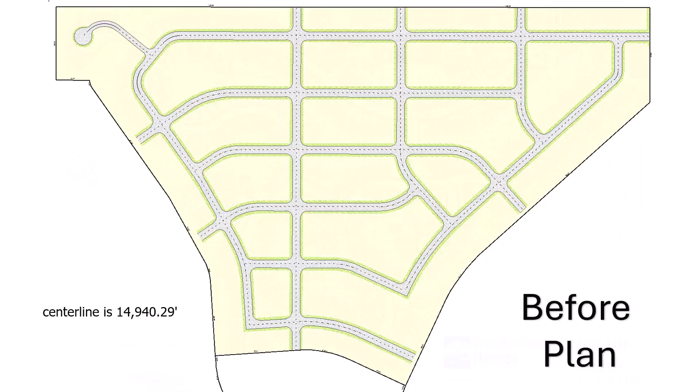This is the actual plan of Horizon Point before our studio was retained to redesign it. There is nearly 15,000 linear feet of street, which translates to almost 3 miles of dedicated street the city would have to maintain in perpetuity. This translates into 6 miles of sidewalks combined with the 3 miles of utility mains.

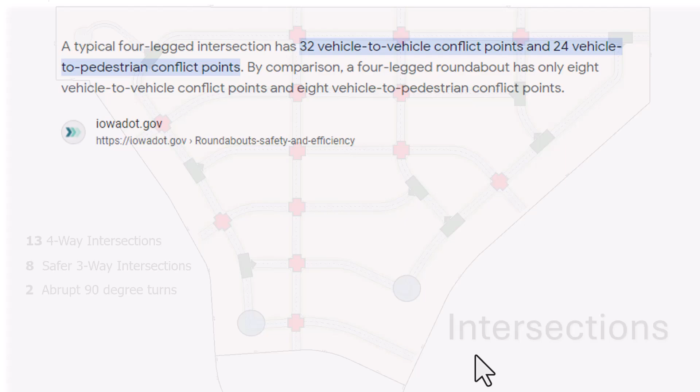This slide shows that there are 13 four-way intersections, 8 much safer three-way intersections, and 2 abrupt 90 degree turns. Each four-way intersection has 32 vehicle-to-vehicle conflict points and 24 vehicle-to-pedestrian conflict points. Four-way intersections also lead to T-bone crashes known as broadside or side impact collisions.

Victims often suffer severe or life-threatening damages including brain injuries and spinal cord damage, yet many urban planners promote the use of grid design that increases four-way intersections. It is important to consider traffic flow. In 1687, Isaac Newton discovered a body in motion tends to stay in motion. Now imagine that body being a 2-ton vehicle driving through a neighborhood.

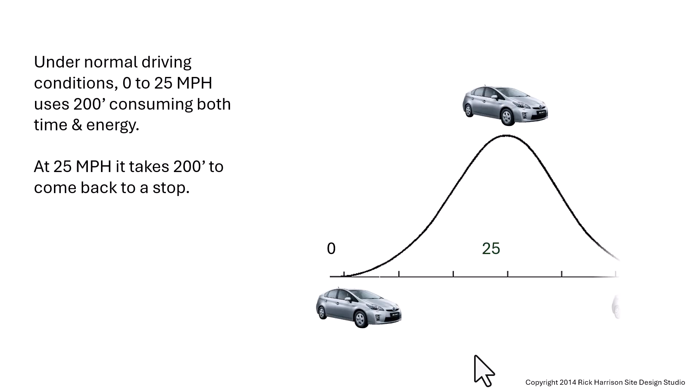Under normal driving conditions, accelerating from 0 to 25 miles an hour, approximately 200 feet will be consumed to achieve residential design speed. Beyond that 200 feet, the vehicle is maintaining flow, consuming much less energy and much less time. However, that vehicle has to come to a stop, which also will consume 200 feet. Thus, the stop, accelerate, stop distance is about 400 feet, and anything beyond is efficient in both time and energy.

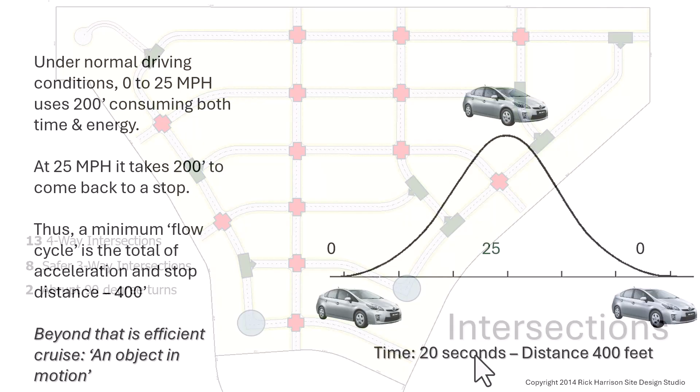Each one of those four-way intersections is going to have at least one street having a stop sign, if not both streets. From an energy and time perspective, just to get home, this previous design is extremely inefficient. Because of this, residents will tend to roll through intersections and tend to accelerate more than normal just to get home. The grid produces a massive amount of length of street, which consumes 22.6% of the site.

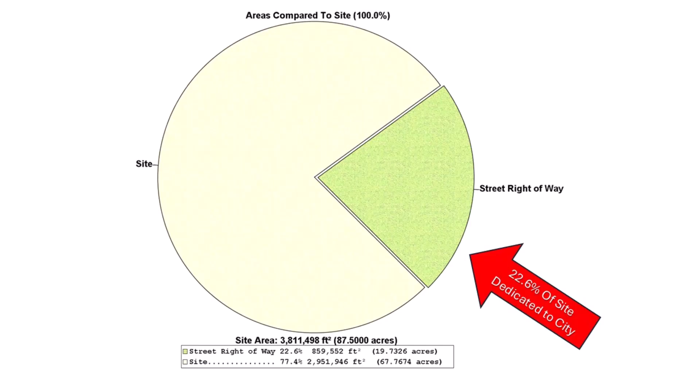It is dedicated to the city and not dedicated to the residents who are investing in the neighborhood. Compared to the total site area, 15.2% of the entire site will be street pavement, which the city will have to maintain forever, contributing to runoff of stormwater.

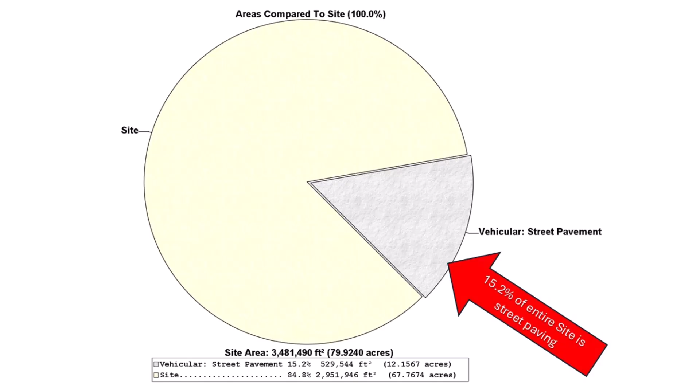Before we continue with this presentation, we would agree with many urban planners that the typical curved street subdivision may introduce several problems with connectivity and efficiency. Any product can have bad design or good design, and poorly designed curved developments become the target of those that believe the urban grid of the past is superior. It is important at this stage to demonstrate how much waste is in the grid design thought to be efficient.

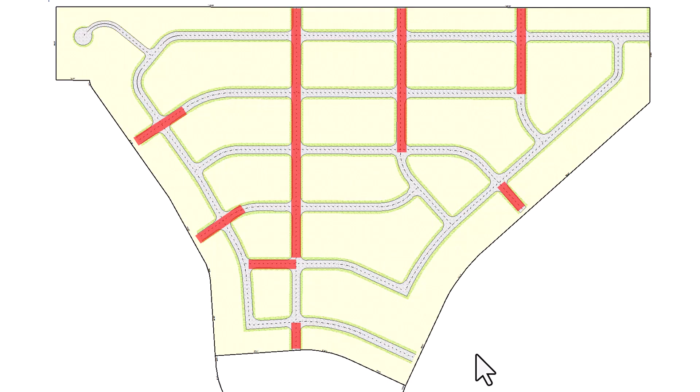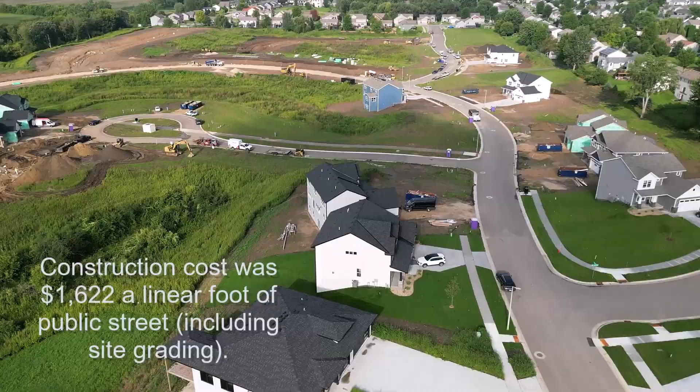As an international land planning firm, we typically do not get involved with the local economics of development. However, we did recently develop a similar-sized neighborhood in Rochester, Minnesota. In 2024, our cost of construction was $1,622 a linear foot of street. Similar to Horizon Point, our development is on rolling terrain, where a curved street pattern as we design it conforms to the natural flow of the land versus a straight street grid which does not.

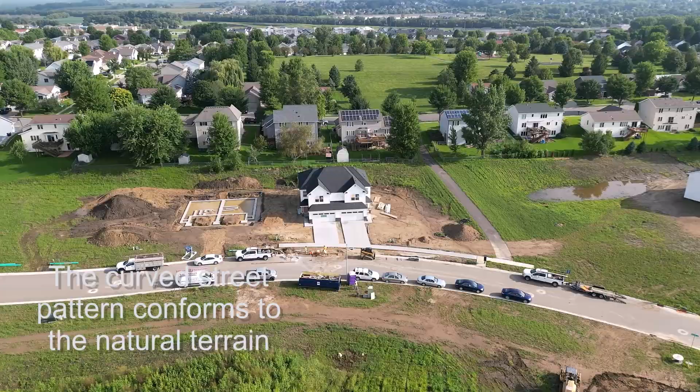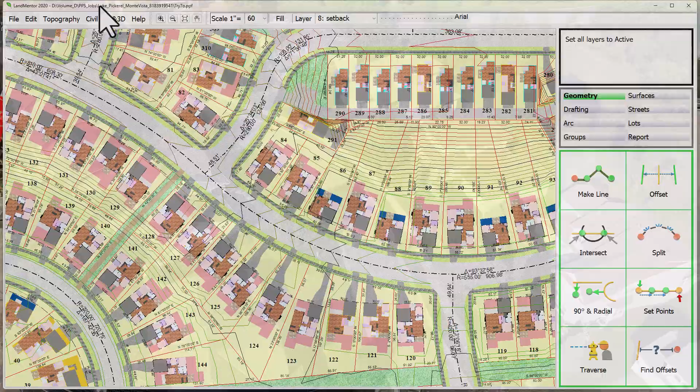If construction cost is similar in your region, the 3,830 linear foot reduction of street would equate to an $18,655 reduction per lot in construction cost. This cost reduction can be used to provide a better home with better landscaping at a more attainable price. But a properly designed development harnessing the latest geometric patterns and technologies offers multiple advantages over the grid of the past, which we will explain here.

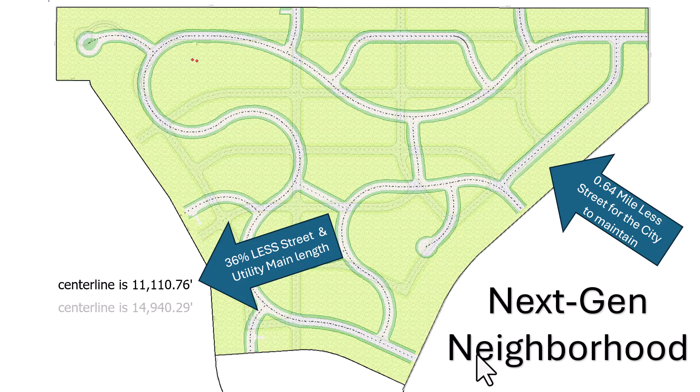Our redesign of Horizon Point neighborhood utilizes these new methods, which eliminate the waste of urban and suburban patterns, with only 11,110 linear feet of street, which is 36% less street and utility main length than the original grid design, more than half a mile of street that the city will not have to maintain forever. We demonstrated previously the grid is in fact extremely inefficient in both time and energy. Looking at Horizon Point, a main street maintaining constant flow defines most of the neighborhood.

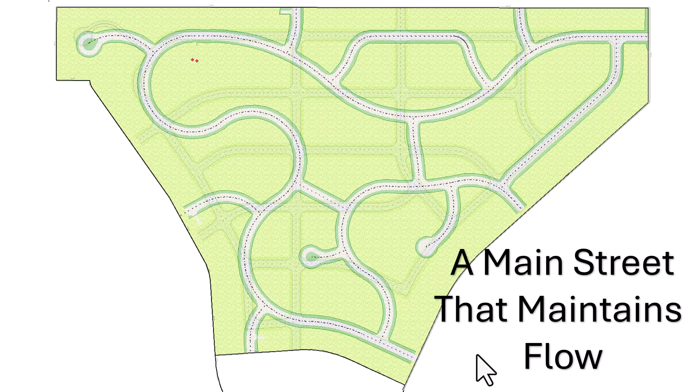Combined with another smaller loop street, it should be obvious harnessing the curves in this way significantly increases the efficiency and attractiveness of a neighborhood. In addition, the curved streets are naturally traffic calming. There are no four-way intersections, only three-way intersections.

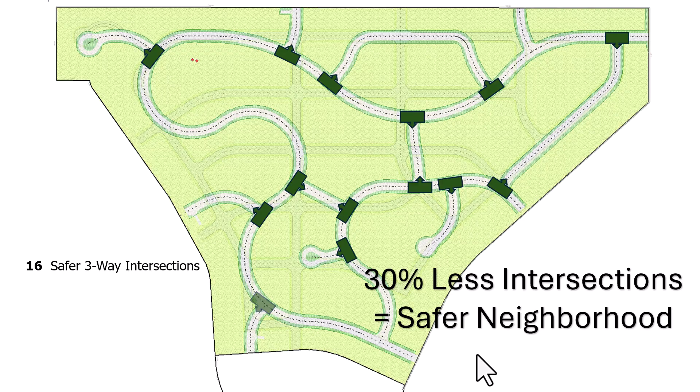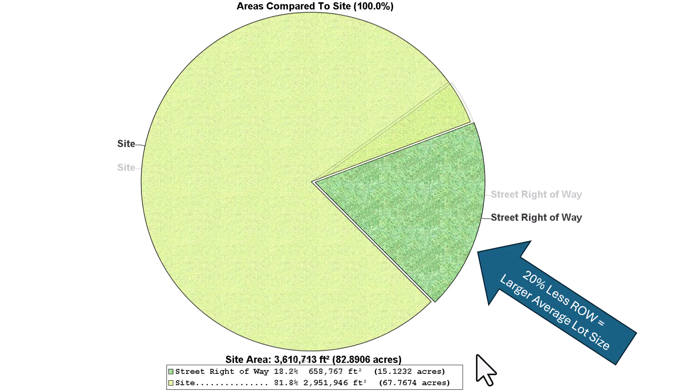The total number of intersections is 30% less, most being on the outside of a curve to create better sight distances. There is 20% less total right-of-way dedicated to the city, which means every lot has a larger average lot size, which increases the value for the 333 residences that will live within our neighborhood. In addition, there's 20% less street pavement the city will have to maintain.

Walkability is assumed to be the main advantage of the grid design, claiming to be superior to curvilinear suburban subdivisions. This is true because most planners of suburban development ignore walkability. All of our neighborhoods take walkability into consideration in the initial design process, not as an afterthought. Let's again look at the grid from a walkability perspective.

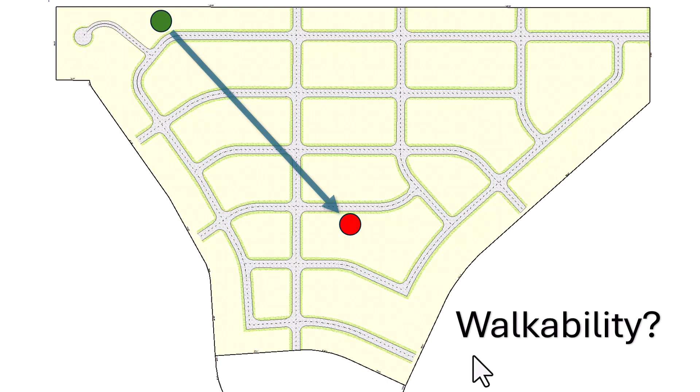Suppose you want to walk skewed through the neighborhood. You live on the north side and want to visit a friend a bit to the east and south of where you live. As you can see by the pattern, when you leave your home and stroll through the neighborhood, you must negotiate 1, then 2, then 3 four-way intersections. You have to cross that fourth intersection twice. The total distance straight between homes may not be that much; however, because you have to zigzag through the grid, the actual distance increases about 30 to as much as 40%.

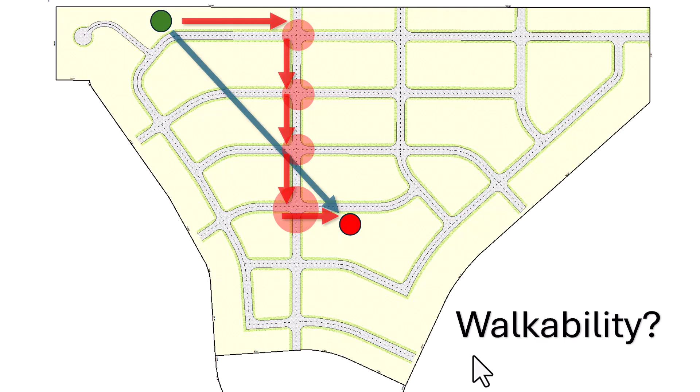In addition, most of that walk will not be along nice home facades, but instead alongside yards which are never as attractive as fronts, often varied fencing or views into rear yard clutter. Because of these factors, you might drive to the neighbor instead of a stroll.

Now let's take a look at the redesign with areas that we included through the block trails to help reduce total distance. You walk a little bit to the east to use the crossover trail, which is just one street crossing within line of sight of drivers. Then you walk around a curve, then have to negotiate one three-way intersection to get to the neighbor. Which do you think is safer? Which do you think would be more convenient?

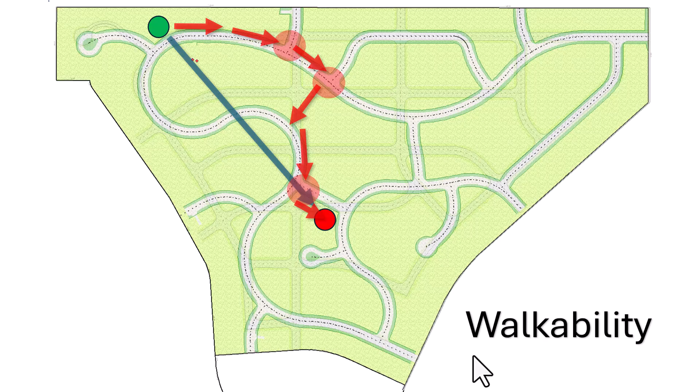This neighborhood uses a method that we pioneered 35 years ago called coving. It is the harnessing of the street pattern and eliminating waste typical in a design, be it a grid or curved suburban design. Coving utilizes meandering setbacks to gain space and efficiency. It does something unique in the planning industry, as it gains efficiency by increasing regulatory minimums, not decreasing them.

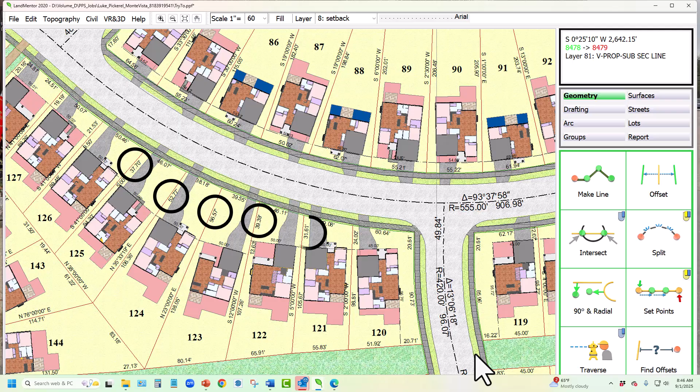The sense of space one feels as they drive or walk through a neighborhood is going to be the distance facade to facade. The less distance facade to facade, the more claustrophobic the neighborhood will feel no matter what the lot width. Thus, the character and monotony of the development is entirely dependent on the increased architectural and landscape details, adding to the unaffordability of housing.

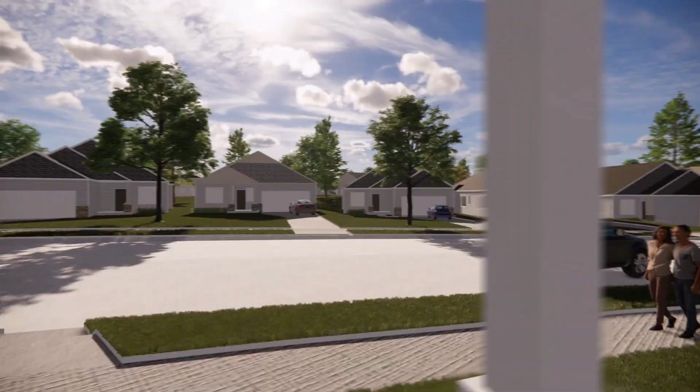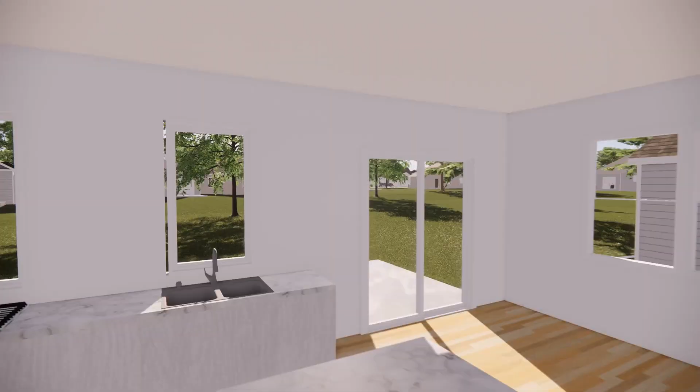This neighborhood undulates the front yard setbacks along the outside of curves, providing more of a park-like setting that's impossible to replicate on the grid development. The blend of curves and undulation reduces the perception of density while increasing views from within home living spaces, not only out the front windows, but also significantly rear-to-rear distances for most homes in the neighborhood as compared to a gridded development. The grid neighborhood must compress every setback to the absolute minimums, which is due to the street right-of-way consuming the site.

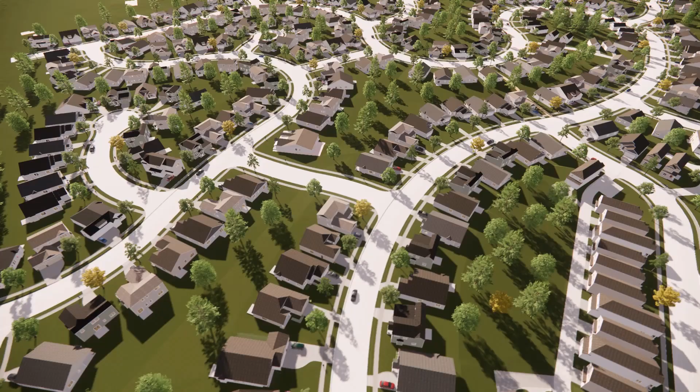This unique pattern is made possible by the technologies and methods that our company has pioneered, which provides a higher standard of living, more efficient and safer neighborhoods, with less environmental impact while providing more attainable housing. The demand for these neighborhoods that we design is huge. To the home buyer, we provide attractive neighborhoods with more space, more value, less monotony, and safer environments that are also attainable to the middle market.

The reduction in site construction cost allows more funds to be used for better landscaping and architectural detail without increasing homes' cost to the consumer. This is a win-win situation for both the developer and the city, but more important, to the home buyer.